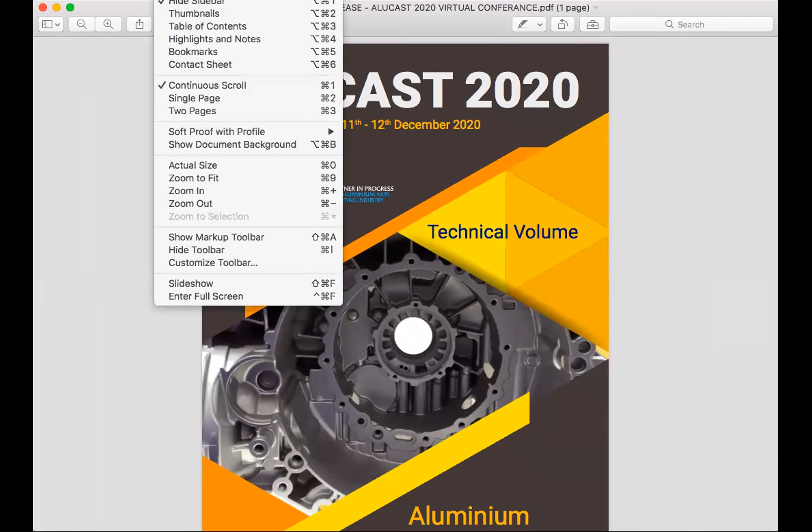Presentations. First on my agenda today is the launch of the technical volume of the conference. And I will be requesting our special guest for the day, Mr. Kaushik Manna, the Chief Operating Officer of Rockman Industries, to release this publication. Samita, can I have the report on screen, please? Sure. There we are. Mr. Manna, can I request you to declare this technical volume as launched?

Yeah. Good morning, everyone. So this is my honor and pleasure to declare this technical volume as launched. Thanks, Mr. Manna. Right. Copies of this technical volume will be received by all registered participants on a pen drive, specially prepared for us by Raga, the Raga group. Thanks to Mr. Rahat Bhatia.

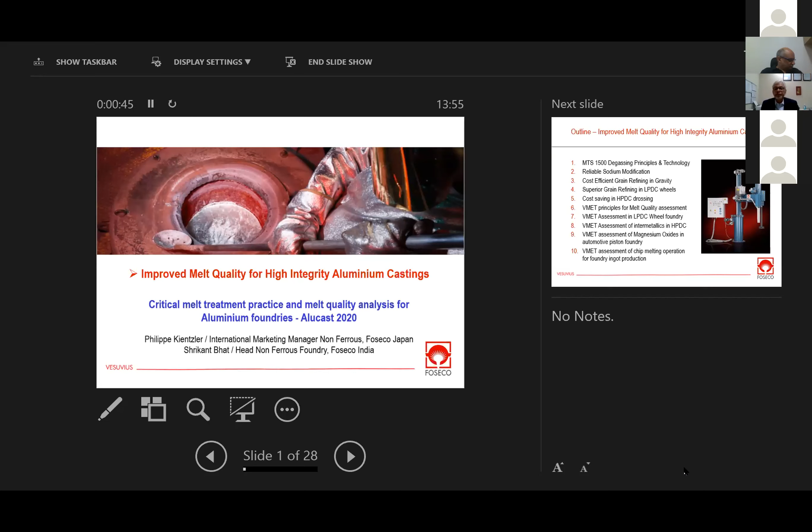In the last 10 years, I've lived in Asia, China, Japan, and I've been traveling across most Asian countries looking at foundry practice, improving melt quality, supporting our local teams in removing some defects or developing some new products. So I've summarized some of the projects I've done in the following paper. We are not going to review everything because that's in the paper, but I will run through some of the key points that we have found about the key benefits of the technology, but also about what we call VMET,

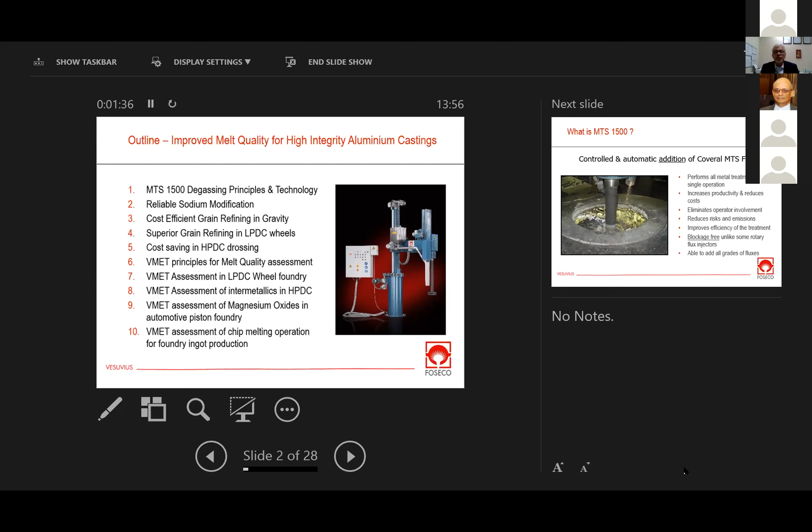which is our new metallurgical assessment of melt quality, because more and more today's foundries want to know how good their melt is. And they are looking for tools to evaluate the melt quality either before casting or in the melting furnace. So this is a very important step, and I will review some of the important things we have done in high pressure die casting, but also in low pressure wheels, as well as in chip melting, for instance. So first of all, most of you, I hope, know now about MTS, this technology.

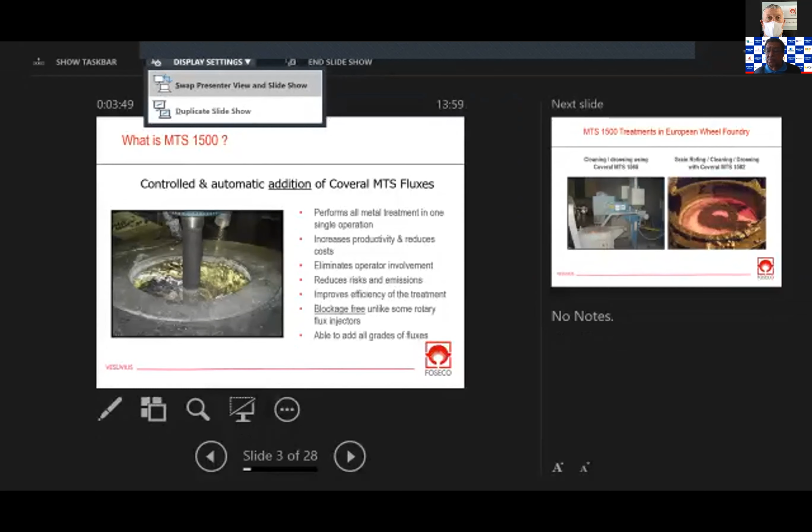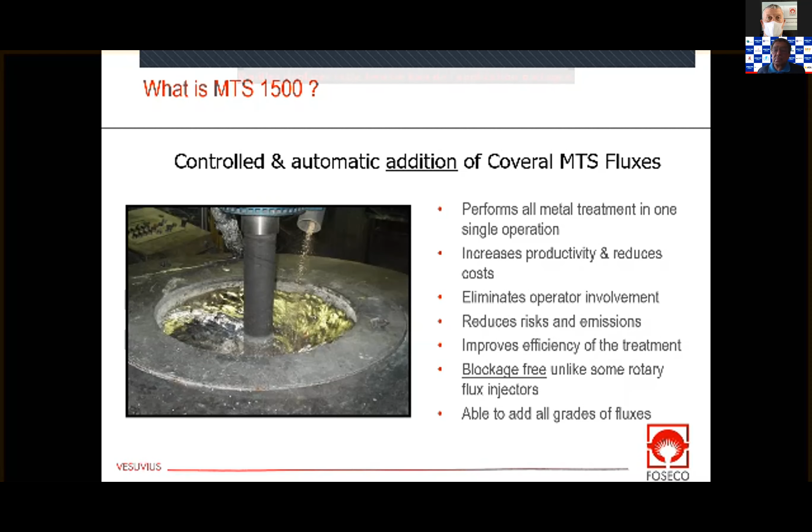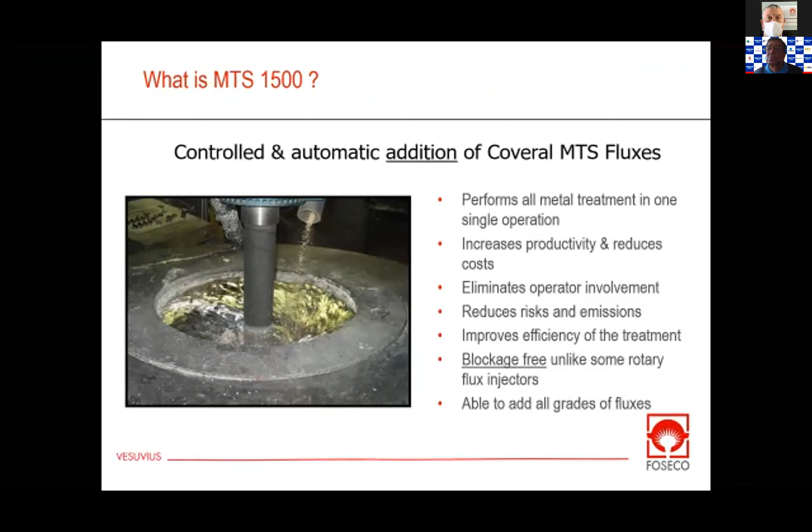So, about 15 years ago, we developed this technology called MTS 1500 Metals Treatment Station. And we've been quite successful because this technology enables every kind of foundry, whether it's sand, gravity, low pressure, or high pressure die casting, to see some kind of benefits. So in the early days, the benefits were cleaning and drossing. And these are examples from low pressure wheel foundries making OEM wheels.

Very quickly, we moved into more difficult applications, such as titanium boron grain refining, which is a very important process, both in gravity and also in low pressure wheels, because it has a big impact on elongation, on UTS, on mechanical properties of the casting. So nowadays, we are able basically to use this technology for some kind of benefit in almost every segment of the aluminum foundry.

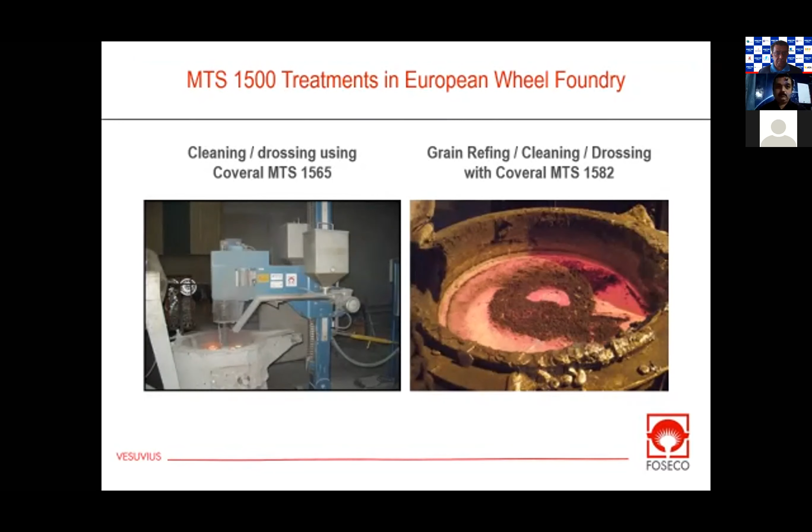And last but not least, our latest work has been in high pressure die casting, which was always perceived as a less stringent or less critical area. But we find out nowadays that more and more high value castings are made with the high pressure die casting process. So the control of quality and achieving higher melt quality, even if it's not degassing, but achieving better cleaning, removing oxides and inclusions, especially intermetallic inclusions that can lead to hard spots, these are critical points that high pressure die casting foundries are having to address these days.

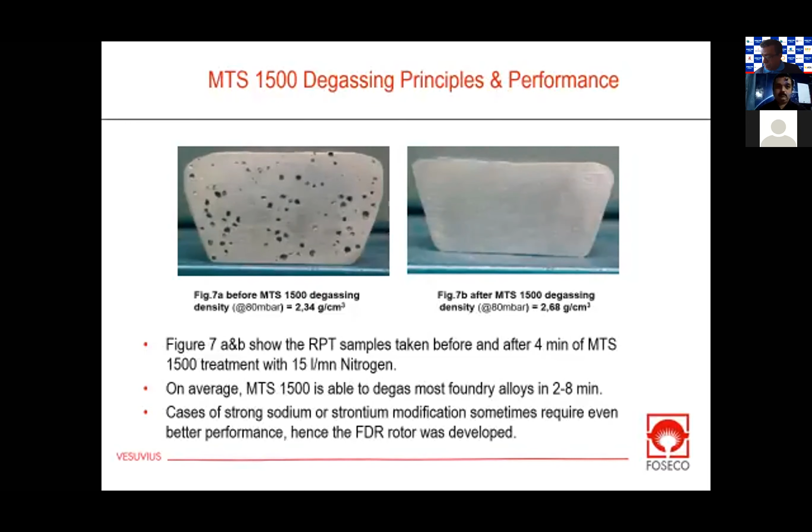How did we achieve that? Foseco has several R&D centers in the UK, in Germany, in USA, and we've done a lot of work to better understand the degassing and the degassing performance. So here is an example we did in our lab in Germany. We have a 500 kilo crucible where we are able to do live experiments and live treatments on real melts. And in the early days, we had our standard rotor, which is called SPR, which is the blue one.

And you can see here plotted how the hydrogen content will vary over time during the degassing process. Here, typically, we're showing 4 minutes of degassing.

Now, because we've done a lot of R&D and work internally, we've developed the rotor which we call XSR, shown there. You can already see that rotor will drop the hydrogen level much faster than the standard rotor, so this is an improvement in terms of the degassing efficiency.

And today, the XSR rotor, the red curve, is the standard that we have at our customers in many parts of the world, including in China, for instance, where I have spent a considerable amount of time. But we continuously need to develop new technology and improve the performance.

So in the last decade, we've been working on a new rotor called FDR. This is the yellow curve shown there. And you can see that this new rotor enables us to further degas much faster and to much lower levels than was previously done with our standard rotors.

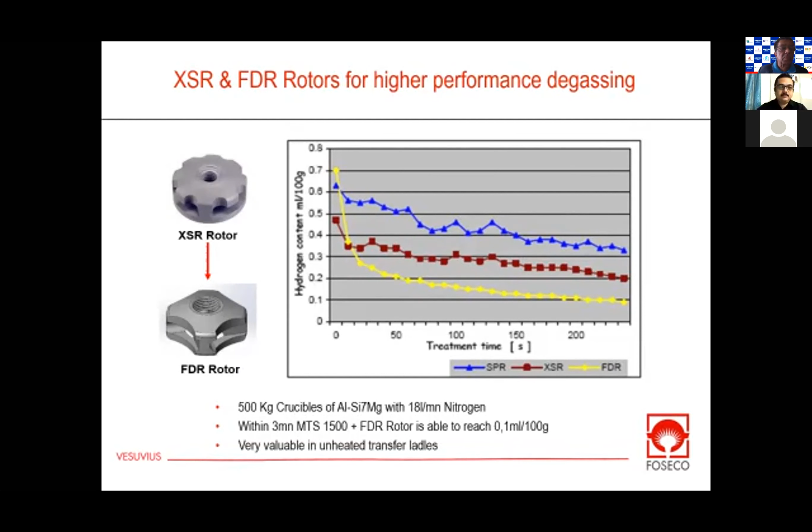Now, this may not be needed in every industry, it may not be relevant in high pressure die casting. Most of our customers are happy with XSR because degassing is not the main issue they're facing. We have other things to worry about: inclusion, oxide films, hard spots, and hard inclusions. But in terms of degassing, FDR will be in the future our best-in-class product for those foundries who worry very much about degassing.

So we moved then to some different applications. You all know that in the past, mostly in sand and gravity casting, sodium was used to modify the eutectic structure of our aluminum silicon alloys. Nowadays, many foundries have switched to strontium, and strontium is recognized as the better way of modifying most castings, whether it's wheels in low pressure or cylinder heads.

Most of the people in the industry use strontium, but there are a few applications which remain with sodium, because when the cooling rate of the casting is not sufficient, when you try to use strontium modification, you sometimes have shrinkage, residual shrinkage that the foundries cannot get rid of.

And for those reasons, I know many foundries around Asia and around the world who are still using sodium because sodium is a much stronger modifier than strontium. Here's the case though: the problem with sodium is you have to use a lot of sodium, you have to use a lot of flux.

So we've developed an application where basically we can reduce the addition rate of the sodium. In this typical case shown here, we go from 0.3 to 0.1% addition using our MTS process. So for the foundry, they will get the same quality, but there's going to be a significant reduction in cost in the addition of the sodium, in the addition of the flux. So this will be a benefit for those foundries.

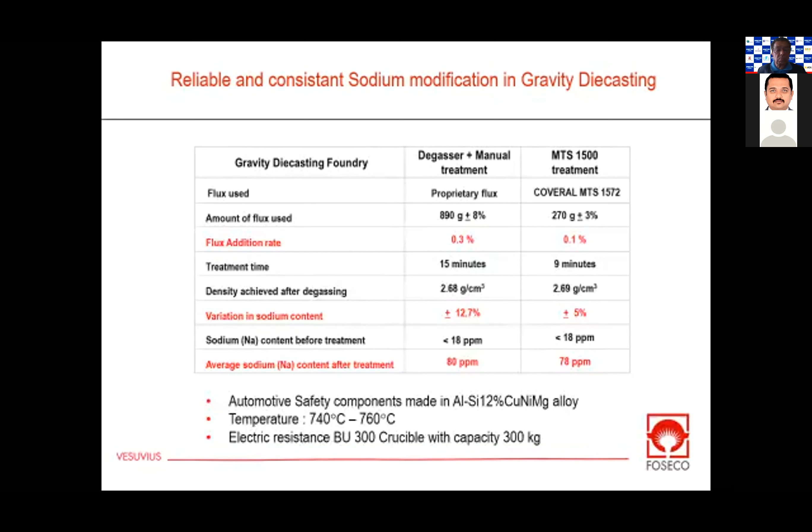And in Europe, in Germany, but also in China, we have some customers who are still using sodium for this specific application because they cannot get the same level of quality with strontium.

Then we did some investigation to further understand this. And again, we went back to our lab and to our 500 kilo crucible which we have in Germany, where we are able to do a set of experiments. And what you see here is we increase the amount of flux used on the x-axis, anywhere from 200 grams to 1 kilo of flux of a sodium modifier, and we measured the sodium pickup that we have in the melt.

And what you can see is that if you use this MTS process, basically the sodium pickup, for the same parameters, the same crucible, the same condition, the same alloy, everything else being the same, is about 2 to 3 times higher than when people use the traditional method of introducing sodium.

So again, many of these foundries in Europe, in Germany, a few in the USA, but also in China, we now have customers who have moved away from the traditional sodium process to our MTS process because basically they're getting higher yields of sodium modification.

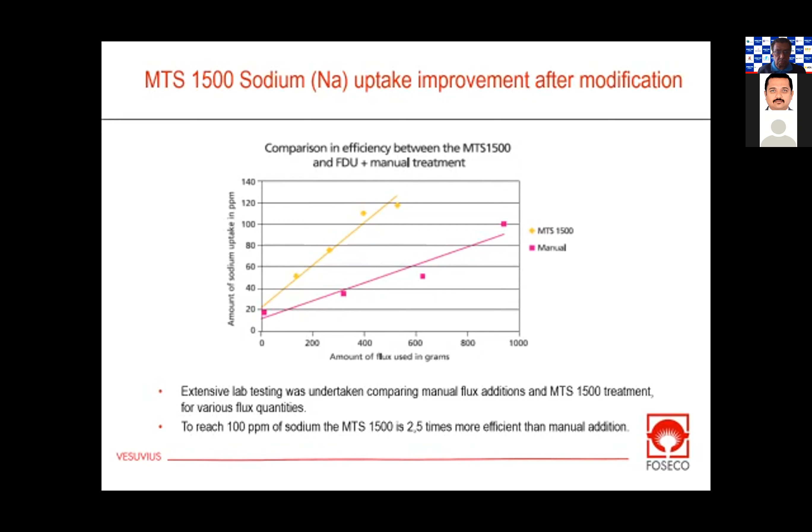Now, this means either better quality for the casting, less shrinkage, and a much finer eutectic structure, or it means less sodium use, so a lower cost for the foundry because they can reduce the addition rate of the sodium or the sodium flux. So again, this has been an important breakthrough for us.

Then we moved into grain refining.

And all of you know that in sand, in gravity, and in low pressure, titanium boron grain refining is a very important part of the process. And especially when you do safety components, you know that the mechanical properties, whether it's elongation, whether it's UTS, are directly correlated to the grain size.

Of course, there are other things. There are oxides, there are other parameters that will affect these mechanical properties, but grain size is a critical factor if you want to make wheels, if you want to make certain safety components, suspension, transmissions, and things like that.

So we had a lot of success in gravity, automotive foundries, or suppliers who make suspension knuckles for the automotive foundry. And here's an example from one of those foundries where you see the grain size before. This is a sample solidified from the melting furnace before grain refining, on the top.

And you can see the large grains. And on the lower side, you can see after addition of 0.04%, which is much lower than the normal Tibor grain refiner, you can see the structure we get.

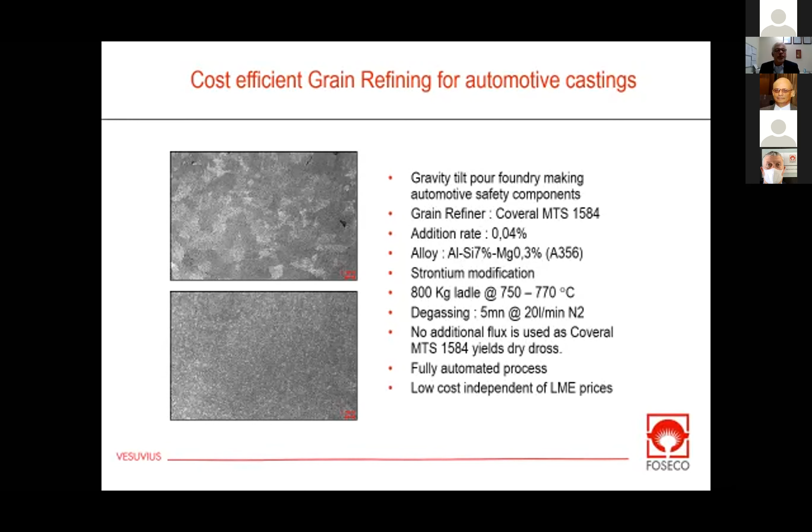So many of these gravity foundries have switched from master alloys, and I'm showing here a little calculation and a cost evaluation we did a few years ago in Europe with one of those foundries, where we compared.

So they were using roughly 1 kilo of Tibor master alloy per ton of melt, and we were able to reduce this to 400 gram because our grain refiner has a higher percentage of titanium boron. So we are able to reduce the addition rates, and we are able to offer a much stronger grain refining and achieve a much finer grain than what they would otherwise achieve with the master alloy.

So for those foundries, there's two advantages. One of them is a finer grain, better mechanical properties, and a cost reduction because of the reduction in the flux compared to the master alloys. So those foundries who are using this process have completely stopped using the Tibor master alloy. This is a significant saving for the foundry in terms of purchasing, okay?

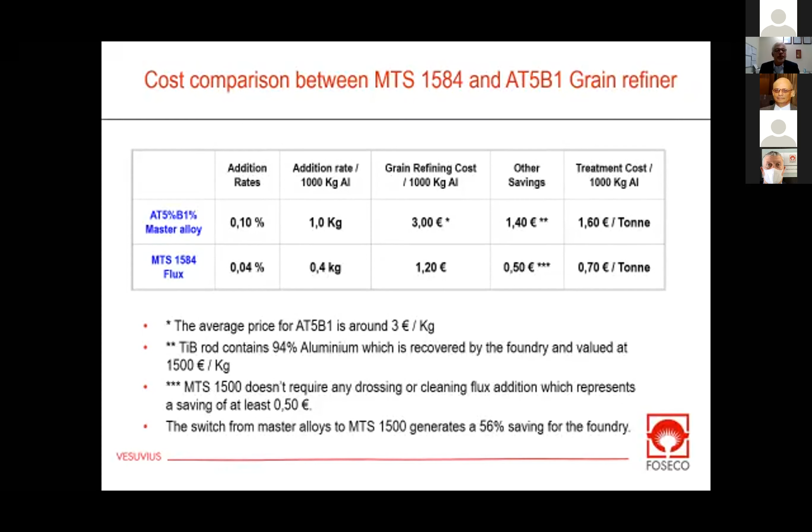So not everybody's using it, but I think more and more foundries nowadays are doing this kind of comparative work, and it doesn't always have the same outcome. It really depends on the requirement of the foundry. Those foundries making safety components, those foundries making critical components will see a benefit in this. Of course, if you make very general castings, non-automotive castings, maybe the master alloy will be good enough. Maybe this is not necessary. This is for every foundry, basically, to evaluate and to decide for themselves.

After that, we moved on to a much more challenging segment, which are the aluminum wheels made in low pressure. And as you know, this is very important in India, in China. There are hundreds of millions of aluminum wheels made, OEM wheels made for the cars every year. And these wheels are safety components. They have to be exempt of gas and shrinkage.

We cannot tolerate oxides or inclusions, especially if they're above a certain size, because they will reject the wheel. They will lead to premature failures. And of course, we need a very fine microstructure in order to get the mechanical properties.

So this is an Asian automotive wheel foundry, a very large group, which has many foundries and many low pressure machines. So their traditional process, and you have the parameters summarized here, they were using a 700 kilo ladle in which they were adding 500 gram of master alloy and then doing a 9-minute rotary degassing treatment before transferring this A356 alloy into their furnace.

So we introduced our new process side by side with their traditional process. So the ladle's the same. We completely removed the master alloy and we added only 310 gram of our new titanium boron flux grain refiner, which comes out to be 0.04% addition rate. We kept the degassing the same. So all other parameters are the same.

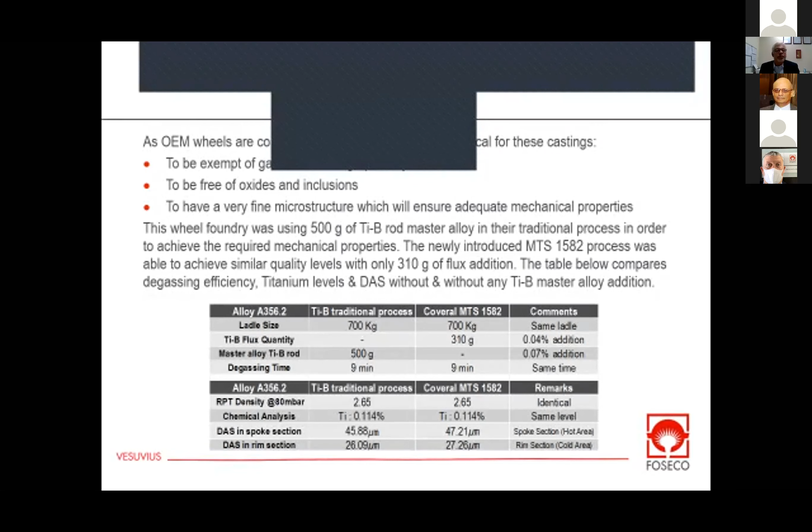Then the foundry did some wheels. They cast the wheels, they took some wheels, they looked at the density to make sure everything was comparable. They looked using the spectrometer. They looked at the titanium pickup because they wanted to make sure that if they switch from a traditional Ti-B master alloy to our product, they wanted the titanium pickup to be in the same range. And you can see here, they had the same range.

They made a certain number of wheels, which they heat treated using the standard T6 heat treatment. And then they took samples from the spoke, from the hub, and from the rim of those wheels. And they measured the DAS, because even though DAS is not directly related to the grain refining, DAS, dendrite arm spacing, is a critical parameter of the wheel manufacturing process.

In modern OEM wheels, you need a DAS which is smaller than 50 micron. I'm only showing this because for the wheel foundry, this was a way of checking that the wheels they were making with our new process were within specification. If the DAS had been higher for some reason, they would have rejected the wheel and said something is wrong. So the DAS measurement is only a way to check that this wheel is within the foundry's specification.

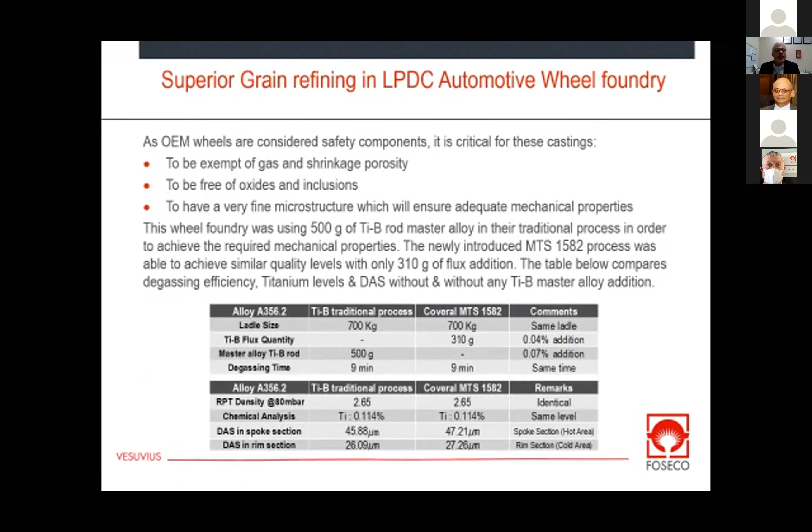The first reason is the improvement of mechanical properties, which we were able to demonstrate. The second is the reduction in the addition rate - 0.07% for the Ti-B versus 0.04%. So for the foundry, this represents a saving because they will have a lower cost when it comes to grain refining.

This is a very important aspect for the wheel foundries, and we are currently extremely busy going to many wheel foundries where we are doing trials and expanding our experience with this product to many automotive wheel foundries across Asia.

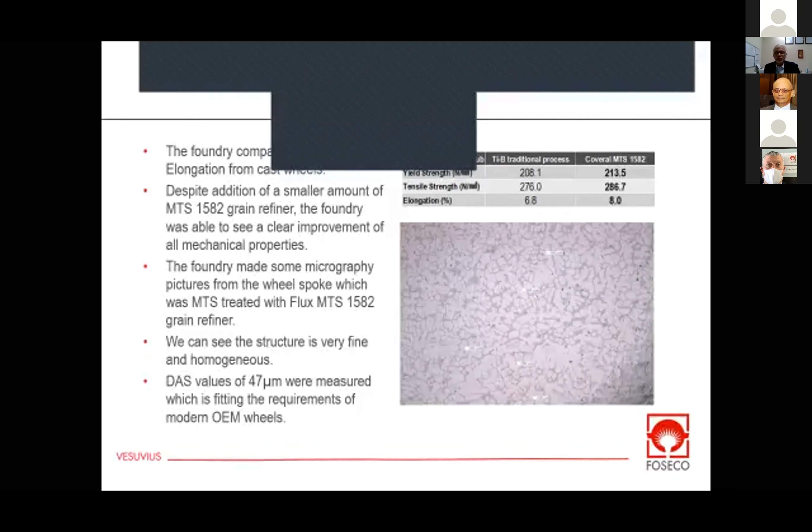So enough for gravity and low pressure wheels. We need to talk now a little bit about high pressure, because as I mentioned in my paper, nowadays 50% of all aluminum castings in the world in tonnage are made using high pressure die casting. This is becoming the most important process in the aluminum industry.

In the country where I'm currently located, which is Japan, we know that 70% of all aluminum castings made in Japan are now made by high pressure die casting. So there is a clear trend that castings are moving from gravity and low pressure to high pressure die casting. There's a real motion, and this trend will continue in the future. So we need to be more focused on high pressure die casting.

So I visited a number of very large automotive high pressure die casting foundries, and this is an example of the work I have done in one. In this case, this is a supplier to the OEMs, to the Japanese and Chinese automotive foundry.

They are using a very large capacity ladle to transfer the melt from their melter to their casting furnace - 1.4 ton, which is very large, and they're doing 180 ladles a day. So this is a very high productivity, very high intensity, high pressure die casting operation.

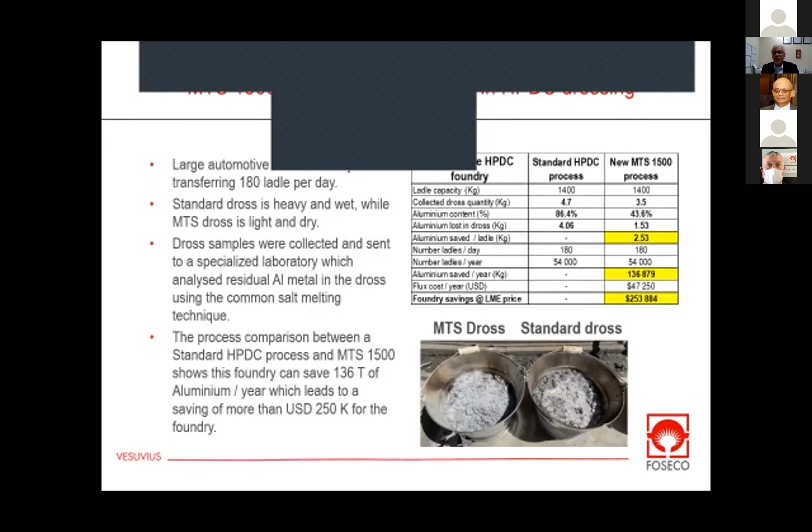So all we did is, rather than use their standard HPDC process, we took the ladle and we used our standard MTS process. And the result of that is a saving of 136 tons, which when I calculate at LME prices is more than $250,000 per year of saving. So this, for high pressure die casting, is a huge saving for no extra cost. So we now have many foundries in China, many foundries in Asia who are looking at this technology and who have already invested in these technologies just for saving aluminum in the dross, because this is a huge cost saving for them.

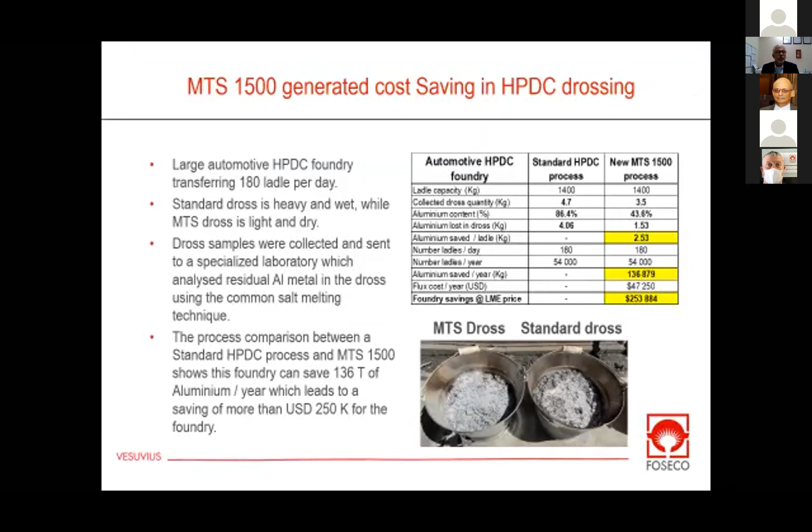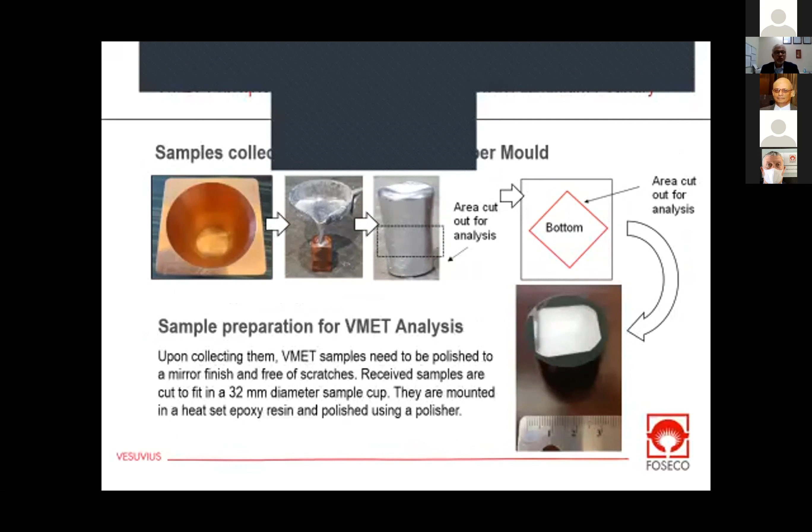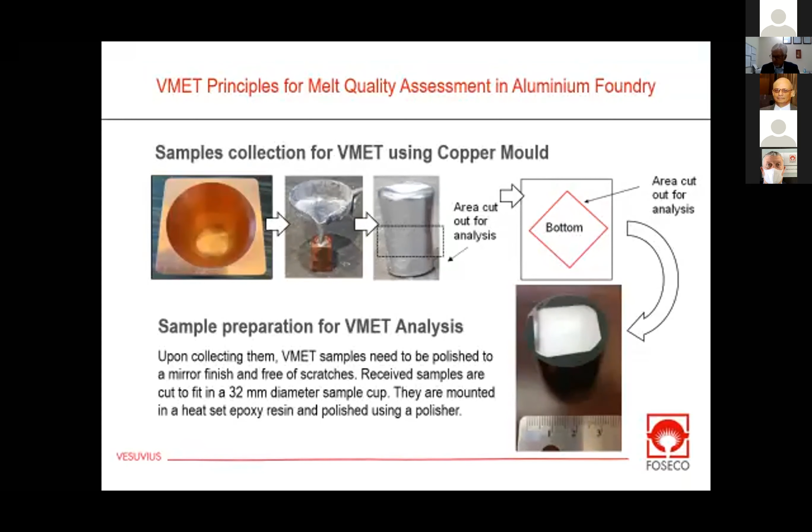So let's talk a little bit about the second part of my paper, where I am combining a new technology called VMET, which is our proprietary technology, which we are using to assess the melt quality, to try to benchmark the melt quality. So we're using a copper mold, which is used in grain refining. People who do grain refining samples usually use a copper mold. So this is something we have in our lab. We take a sample from a melting furnace, from a ladle, from a casting furnace, from a crucible, and then we section the sample, we polish it as you see here, and then we use our SEM and EDS to analyze.

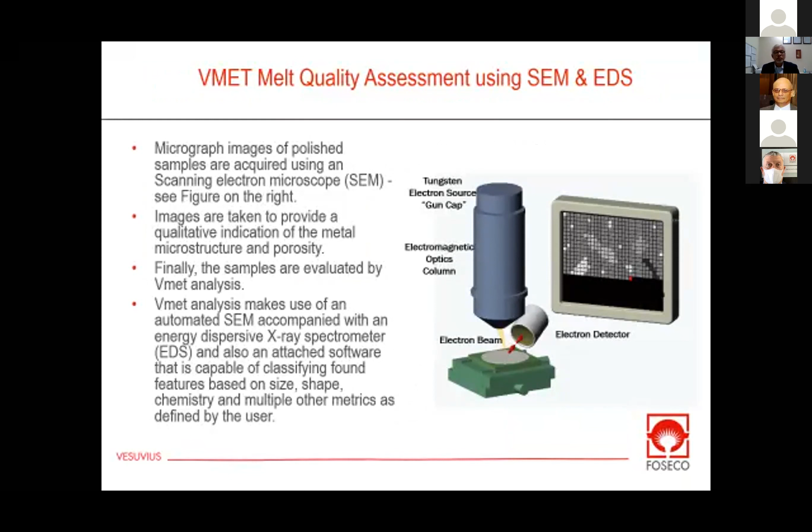Basically what we are doing here is we're able to look at the structure with a scanning electron microscope, and the EDS is a spectrometer that can analyze the chemical nature of the features. So is it an oxide? Is it magnesium oxide? Is it an intermetallic rich in iron, for instance, in high pressure die casting? Is it a pore? Is it a bifilm? Is it a hardened inclusion? So this technique enables us to identify in a given sample any pores, any oxides, any non-metallic inclusions that can lead to defects.

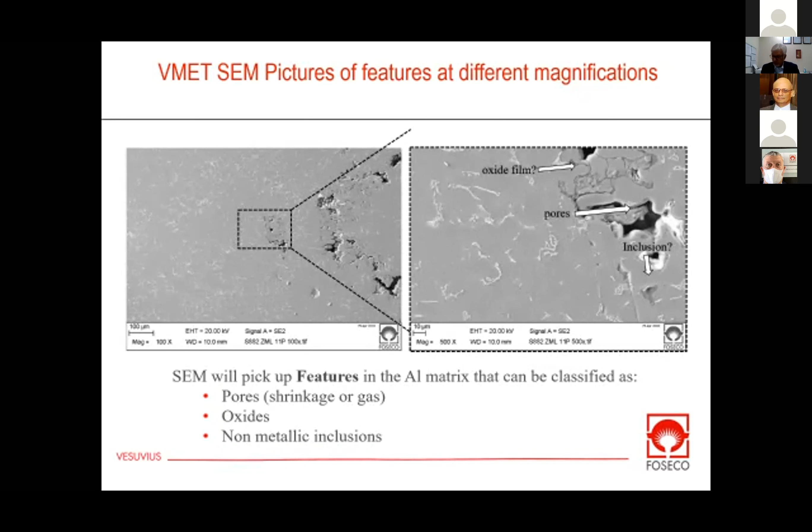Now, this is very important because it tells the foundry something about their melt quality. Before you start casting, before you turn on your robot, you want to know how clean is my melt, how good is my melt, is my furnace ready, or is it very dirty? So by taking this sample, we are able to help foundries, give them some kind of a quantitative measure. Now, why do I say quantitative? This is because this software we developed is going to scan the sample and is going to count all of the defects that are found. So all of the oxides by nature, by sizes.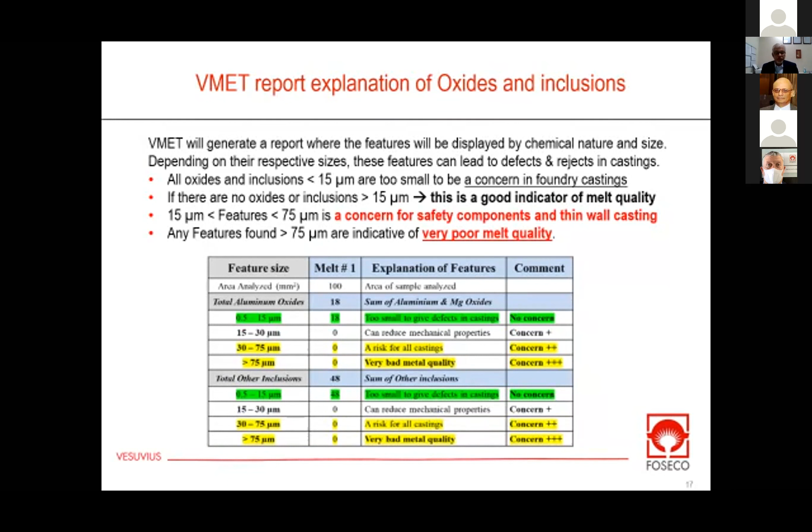This is in safety castings. This is when we start having castings that break, castings where we have cracks, castings that are not gas proof, not pressure tight, because there was some oxide or some porosity in the casting. So this tool is a very interesting tool to try to map and to try to benchmark the melt before we actually make the casting.

So about 10 years ago, we went to a very famous European wheel foundry, which is using low pressure A356 alloy. And we took a VMET sample of the melter, which is the column A356, the white one. And you can see we have found, and that's normal in a melter, you know, when you melt ingots, when you melt chips or scrap, you create a lot of oxide. So this is expected, okay.

Then the foundry has some kind of rotary degassing machine, not using flux, simple rotary degassing. So they process the ladle, and after treating the ladle for 10 minutes, that's the yellow column, we took again a sample, on which we did a VMET analysis, and you can see a dramatic reduction in the number of oxides that we found, in the number of inclusions. And more importantly, the last line, the features bigger than 15 micron, which are a real concern, those that will lead to rejected castings. You can see a real reduction.

So this is a very nice proof, for those people who don't believe in rotary degassing, that rotary degassing not only removes hydrogen, but has a direct effect on inclusions and oxide. And in the past, especially in high pressure die casting, many people disputed that. Many people in the industry didn't believe that rotary degassing would have an impact on their melt quality.

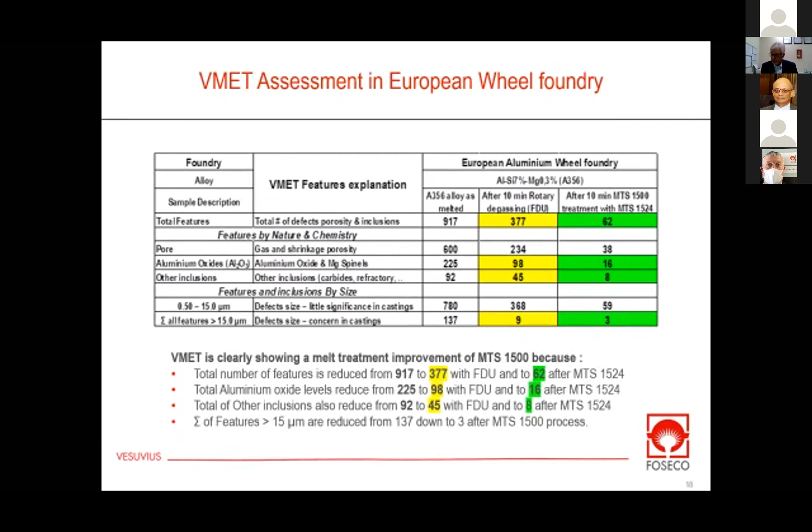We don't need to dwell on this one. This is the same one. It's in the paper where I show this on the graph. Okay, let's now talk about a very interesting example. This is an example in high pressure die casting.

Mr. Kientzler, it's time. Okay, sorry. I know I speak too much. So anyway, are there any questions? Yeah, I think we'll have to go ahead with the questions. I'm sorry to interrupt you here, but— No, it's no problem.

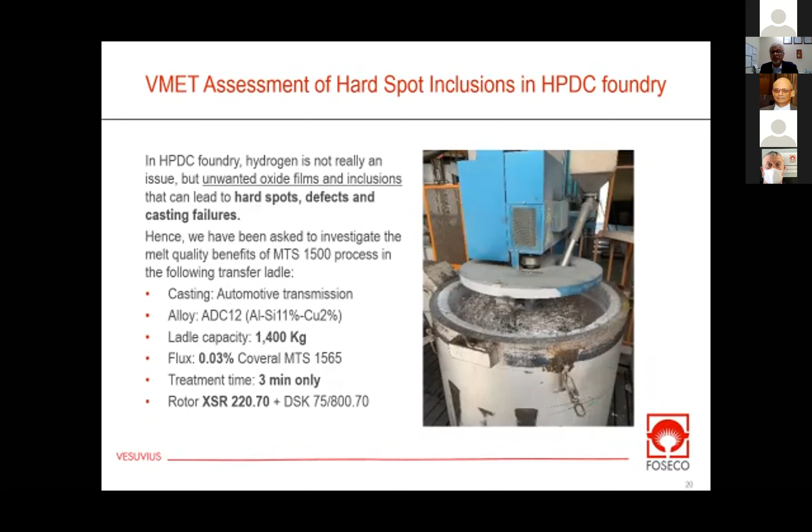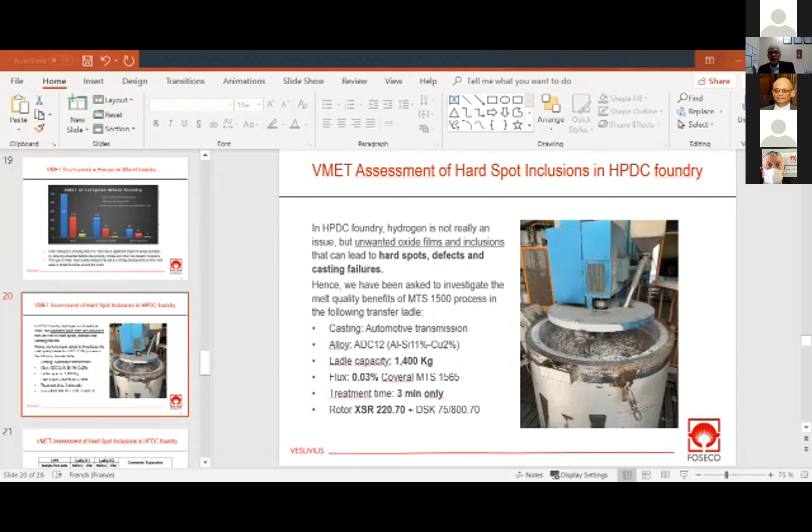There is one question just come in from Mr. Vashisht Kumar Tripathi. He's asking you, can you show some data on the comparison of molten metal purity in terms of the inclusions? I think you have shown data, but if you want to answer this, it's open to you. Yes, let me, oh, now I've lost the, hold on. Can you still see my presentation? Yes, we can. Sorry, so let me switch to the last one.

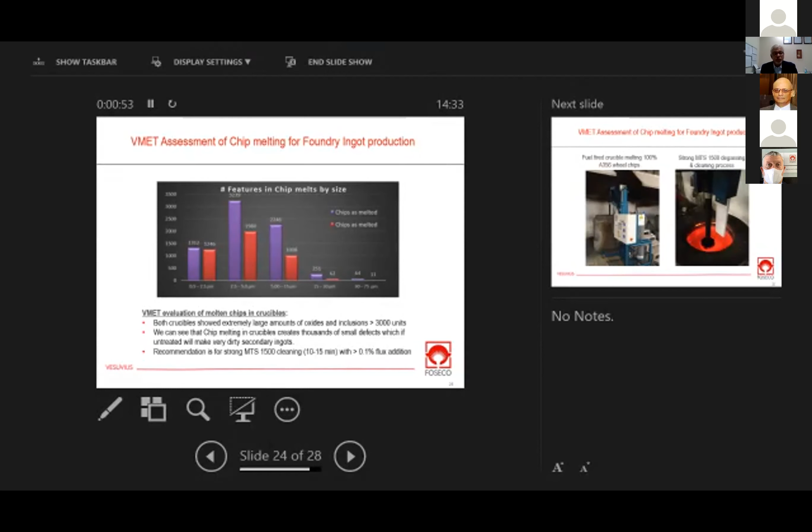Here is the same data, which shows you the number of aluminum oxides. So what I would say is, and of course many people in the industry are aware of that, the people who remelt chips, even if it's only 20% of their machining chips, whether it's in high pressure. I visited many very large foundries; this is becoming very popular to save money rather than selling out the chips, the machining chips.

Many foundries in Asia are now buying melting furnaces to try to remelt the chips themselves. And this is becoming very popular, both in high pressure and also in low pressure, and sometimes in cylinder head in gravity, whenever you generate large tonnages of chips. What I would say from this study we have done, people have to be extremely careful how they melt the chips, because you can see that if you do not melt them properly, if you do not submerge the chips in a dedicated chip melter.

Now, we don't have this, but there are furnace makers in India, in China, in Europe, who have developed chip melting furnaces, specific furnaces that enable you to remelt. So I would always encourage the foundries to talk to these people and to invest into a real furnace that is designed to remelt chips, not try to throw 30% of chips in their own melting furnace, because it can really mess up their melt quality. It can really dirty the melt if the chips are not properly melted. And this is what this last case has shown with this chip remelter.

So with that said, let me get into the presentation here. So talking about die lubricants, true cost savings. When my colleague Vishwanath asked me to talk today, I really wanted to do it more on an education level. Talk about what we look at to make sure we're focusing on the back end of the casting process. But before I get into that technology part of it, I'd like to talk a little bit about what drives us as release agent manufacturers to improve our technology.

And the first there, it's always been there for a long time, increased focus on productivity. And for die casting, it's historically been make things faster and hotter, just controlling that thermal part of the process. Can we kick parts out? And that's still the case now, but it is changing, as I'm going to talk about when we get to some structural discussions. But another aspect that's always been there is reduced waste. Obviously we want to improve our efficiencies, reduce scrap and rework.

But another one that's coming up a lot more is plant effluent and water. Back in 2016, I did present a paper here to ALUCAST on water conservation. I think it was 2015 when the really significant drought hit. So obviously, any conservation we can do is better for everybody as far as water goes. But tooling cost is also there on waste.

And then complexity. These net shape castings that we're making today are highly complex, and that really puts stress on a die lubricant. We have to make sure those parts fill out well, release well, and that can be a real challenge. So it's charged us to step up our game in our technology. But now, let's camp out here a little bit. E-mobility.

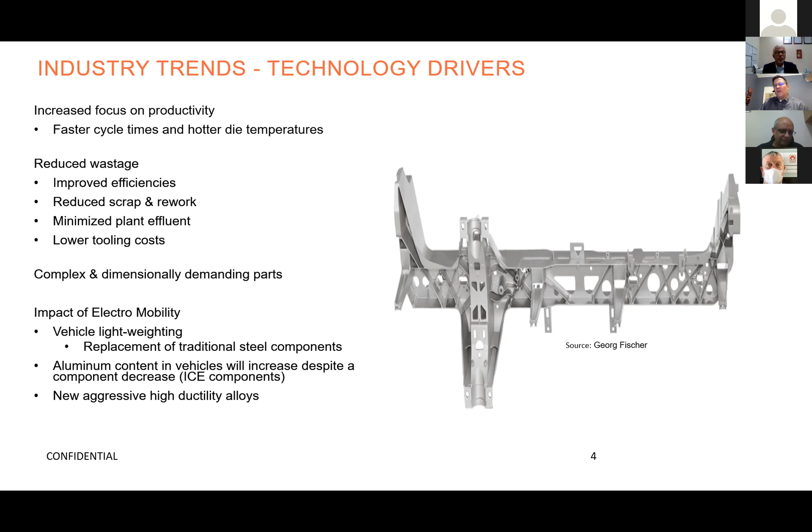I remember when the first structural parts were coming out, and it was the new thing, but now it's becoming commonplace. I know there are some casters in India that are starting to get into this. They're investing in some machines, and it's going to happen. It's a wave. There's no doubt it's heading this way, and this has really had a major impact on our business and our technology, because these alloys are pretty aggressive.

So the structural alloys. They're obviously low iron alloys to get that ductility that we're looking for, and they have a high affinity for solder. So we really have to provide better protection on the die with our lubricants for these applications. I already talked about net shape castings, but these castings now, what used to be so many stamped and welded steel components into a net shape casting, are getting extremely complex and large. So we have to have great metal flow and good release characteristics.

But another big part of this, and this impacts all casters that paint parts, is post-cast processing. We look at these castings specifically for e-mobility because they're lightweighting, they need Class A surfaces, but a lot of these castings are going through cathodic coatings, welding and bonding. It's amazing how many parts now are actually glued together.

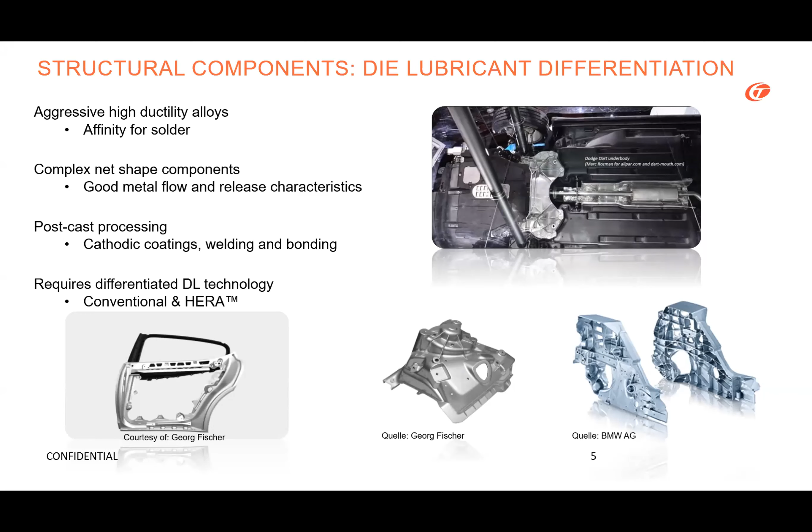We have to make sure the release agent film on that casting, after it's cast, can be removed so the part can be painted or bonded. That's a bit of a misnomer—you may hear people talk about a paintable die lubricant, but it's not really that the die lubricant is paintable. The die lubricant chemistry has to be cleanable so parts can be painted, usually through an alkaline cleaning process. Our sister company, Surtech, is always there to help the industry with any issues, but when we troubleshoot problems, it's typically the cleaning process we have to attack.

All this requires differentiated technology, whether it's a conventional diluted die lubricant or what we call HERA—high efficiency release agent for Chem-Trend. You may also know it as water-free or a micro spray. This goes hand in hand with structural castings and all the tooling technology coming along with it, just as what we're seeing in tooling with additive manufacturing is really changing the game and how we need to approach our chemistries when we develop products, so it adapts and provides optimized performance for a caster.

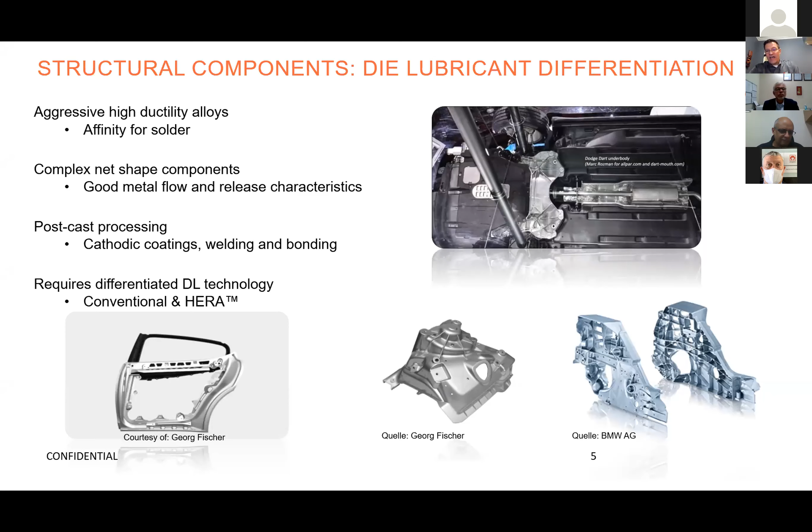I gave a presentation at ALUCAST in 2016 about die lubricant functionality and what we measure—what a die lubricant is supposed to do for a caster. I'd like to retouch on that because I think the education aspect is important. The more the community understands what we're trying to accomplish as a supplier in getting technology out, the better you can use it for improved productivity.

Die lubricants, obviously, we need to release a part—it's often called a release agent. We use the terms die lubricant and release agent hand in hand, but we release parts and also lubricate the moving components of the die. At the same time, we have to provide a good barrier coating for the die, for solder protection, erosion, and everything that comes with that. But you may not realize the die lubricant selection can have a huge impact on metal flow.

When we're talking about castings with deep draws, some of these structural parts, you've got to get that metal in there. It's not all heat—a lot of it is what the die lubricant imparts upon that surface of the die that helps you fill. It's a flow promoter. And surface quality—good castings, bad castings—die lubricants can have an impact on that too.

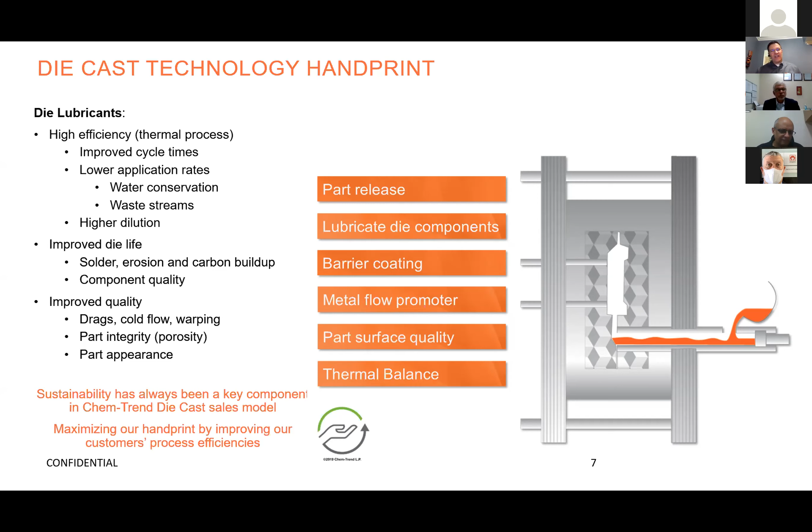So when I talk about all this kind of stuff, I may throw that sustainability part out there a couple times. Now let's shift over to chemistry and how die lubricants work.

Like I said, we're talking about cooling a die. So when you try to cool a die, we're talking about Leidenfrost. What that is, if you ever have a hot pan on the stove, you splash water on it and you see the bubbles of water dancing around on the pan. What they're doing is bouncing around on top of this little vapor barrier. And that is because of the phenomenon called Leidenfrost.

It's keeping that lubricant from touching the surface. If it doesn't touch the surface, it can't cool the die nor build the release coating on the die. That's maximized when we do cool the die. It's maximized at a point called the Nukiyama point, which is where there's nucleate boiling and cooling. I'm going to go into a little more detail there.

But when I talk about cooling, something I want to mention is it's not the lubricant itself that is cooling the die. So it's not the liquid lubricant on the surface, it's when that lubricant evaporates.

So the best analogy I can give is on a hot summer day, when it's 40 C outside, you go swimming, you get out of the water and you feel a chill. What you're feeling is the water on the surface of your skin evaporating. When it evaporates, it takes energy with it. So it's latent heat of vaporization. That's what actually cools.

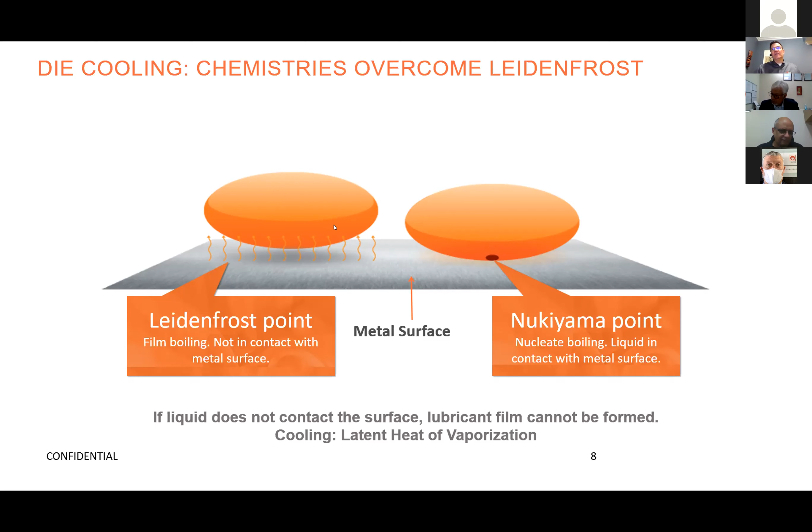So sometimes people say, oh, I need to heat my die lube, I need to cool my die lube. You don't want to do any of that. The die lube is effective in cooling when it hits the surface and evaporates off of that surface.

So when it finally breaks through, that droplet of water and lubricant hits the surface, it explodes. And when it explodes, that liquid evaporates from the surface and takes that heat out with it. So it starts to cool.

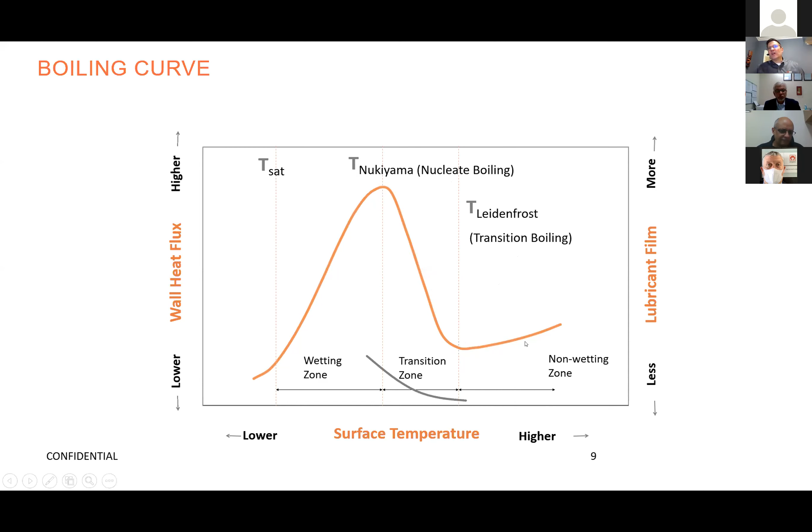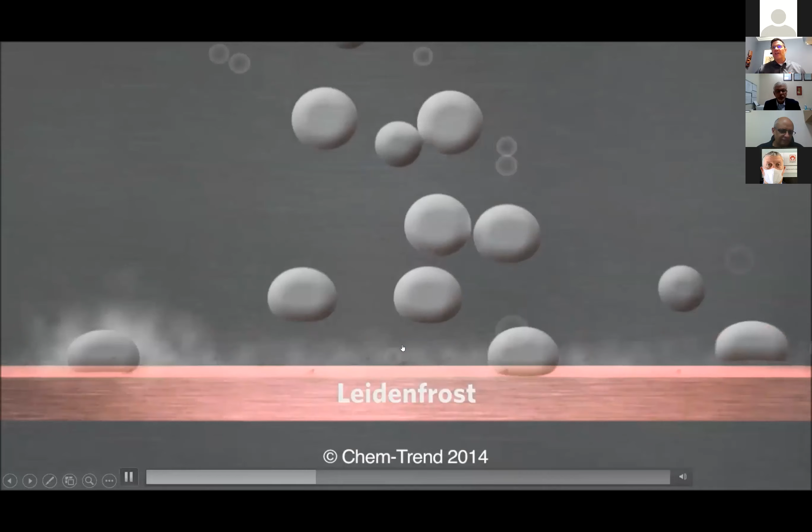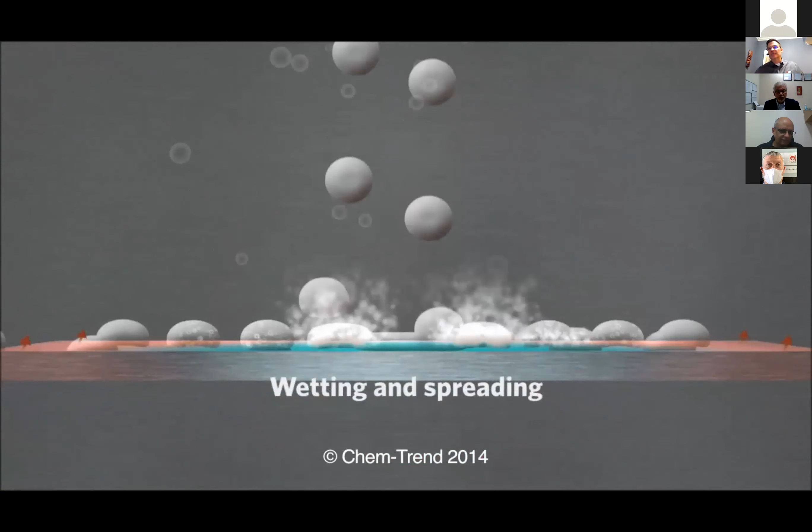Now I have some animation that hopefully will make this more clear. So we're spraying a surface, and these droplets are on the little arrows here. That's the Leidenfrost phenomenon, that vapor barrier. We're not breaking through it, and the droplets are bouncing off until we overcome Leidenfrost and start getting that explosive boiling. So the die starts to cool at that point, and it's maximized when we get droplets that stay on the surface and boil, nucleate boiling. That's where we really start to get wetting and spreading of the die lubricant across the surface, building your protective film.

Now, for years, I hear all die lubricants are the same. I say no, there's a difference. What I'm going to show you now is a laboratory test. When we look at this test, we start spraying a lubricant. We've got two different lubricants here, both Chem-Trend lubricants, and we spray water. We're going to build this cooling curve.

So we start spraying at a nice high temperature around 430 C, and you'll see that as these materials spray, they hit the Leidenfrost point, and you can see it. Once you hit that point, you get dramatic cooling. You can see here, especially Chem-Trend A, it hits the Leidenfrost point and we get dramatic cooling. So you're going to watch this get sprayed.

Once again, this is a laboratory test. To be clear, I'm not saying that if you start spraying a die that's 425 degrees with die lubricant A for 10 seconds, we're going to take you down to 325. This is a relative laboratory test. But what I will tell you is a difference like this has a significant impact on your process and your spray time.

Okay, here we go. Need to pause this for a minute. Upper left-hand corner, there's a chart. Focus on the lower left-hand corner first, this is the higher heat extraction die lubricant, and when that hits the Leidenfrost point, you'll be able to see it. Then we're going to shift our view over to the lower right-hand quadrant to see the second die lubricant. So here we go.

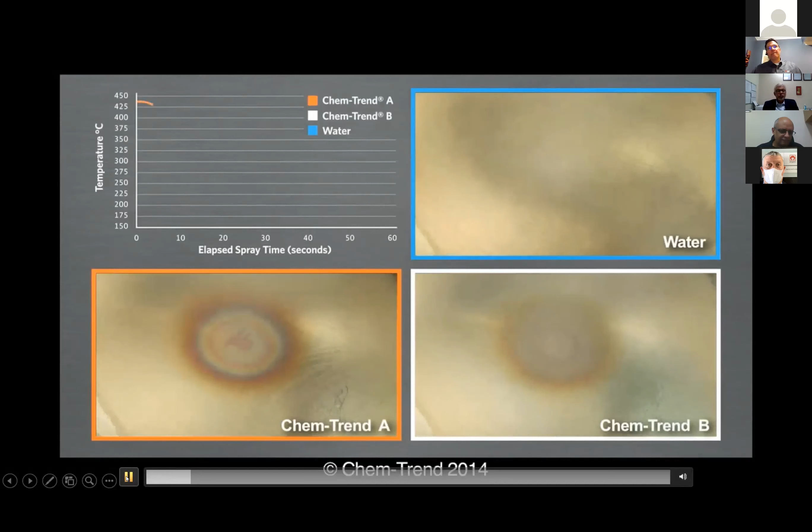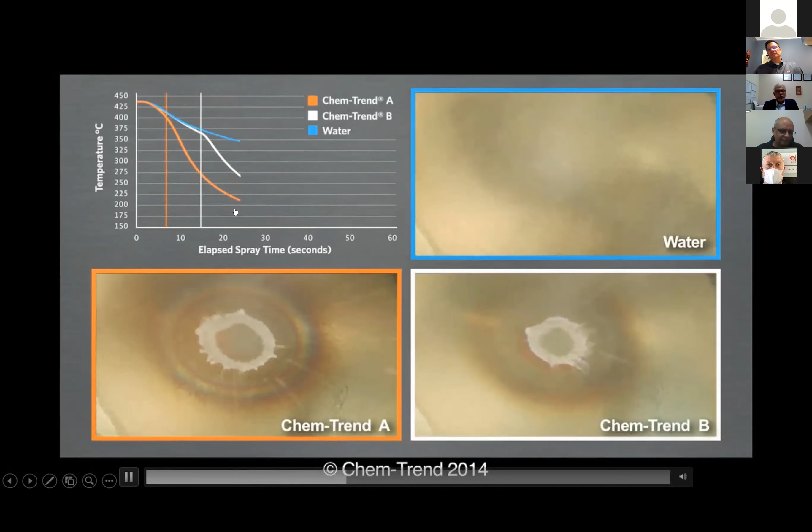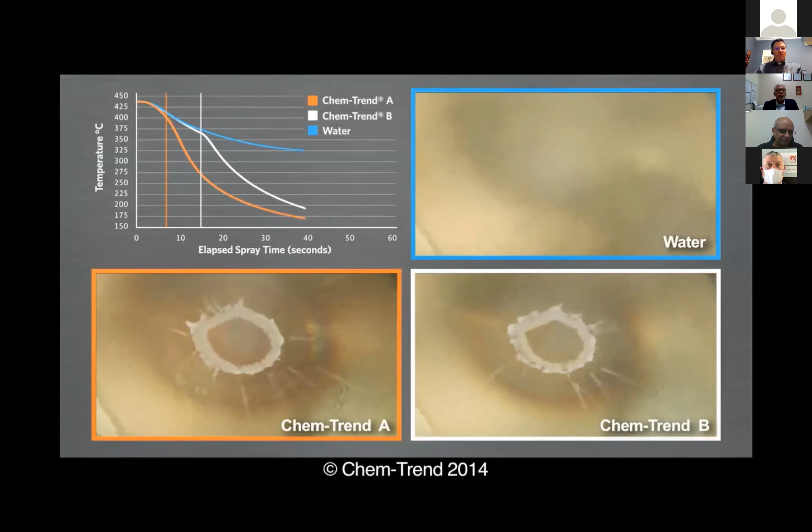There we go, you saw when we hit that Leidenfrost point, all of a sudden you can see that film. Now let's look on the right. There we go, we broke through Leidenfrost and look at that dramatic cooling. And now we wait for water. There we go, water hit the Leidenfrost point.

So if we come back to the chart, a couple of takeaways from this. There is a difference in chemistry, and what you saw there is fully intentional. Typically we're looking for a faster working, higher heat extraction material, but not always the case. If you have some very thin wall castings, say electronics, we're making cell phones.

Do we want this kind of heat extraction? Not necessarily. We need to get the film formation, but we don't want to take heat out of these dies because it's all thermal balance. It's energy in and energy out, so we've got to keep that in balance. If we take out too much, we also get a cold die and all those cold die defects. But the other point is, when used as designed, you get high performance and differentiated performance.

Of course, if you take these and over-dilute them with water, take your dilution way high, more water, what's it going to do? It's going to perform more like water. So you take a die lubricant that's intended to perform a certain way, over-dilute it, and all of a sudden you have the performance of water. And you all saw in this cooling curve, that's a lot more spray time.

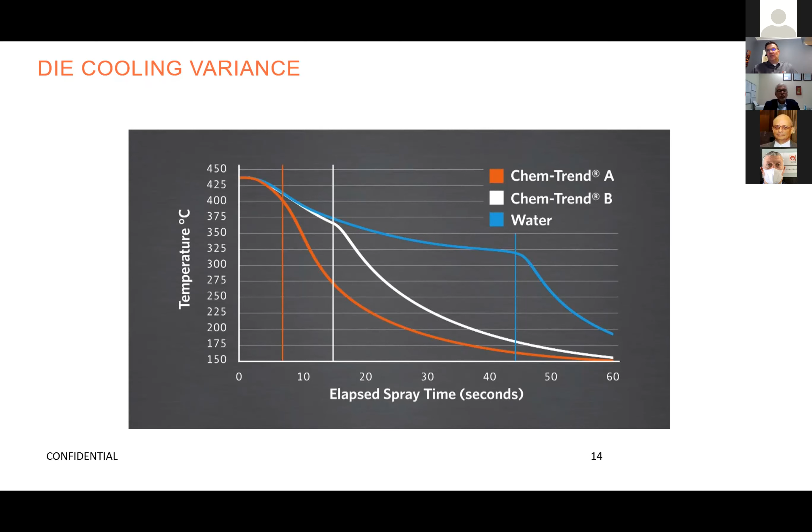So it's wasted cycle time. It's a lot more waste, plant effluent going out, a lot more water usage. And on top of that, you're probably not building the best film possible. I'll come back to that in a moment. So here's a real world example.

If we look at the section of images on the right, thermal images, we look at this zone A, had a max temperature before spray of 377. After spray, it went down to 244. And this is a set spray pattern, set dilution of product. Everything's the same. The only thing we changed is die lubricant technology or chemistry.

So if you go to the high heat extraction die lubricant, that same process went to max 364, and then after spray all the way down to 218 instead of 244. So I don't know if you can all see my video, but it's all thermal cycling. You make a part, you spray your die lubricant, take the die temp down, you inject that molten metal. It's all here again, energy in, energy out.

That energy from the molten metal is absorbed into the die so the part can solidify, right? The die opens up, you eject your part. What do you do again? You spray die lubricant on it to cool the die down, so maintain that thermal balance where you need it.

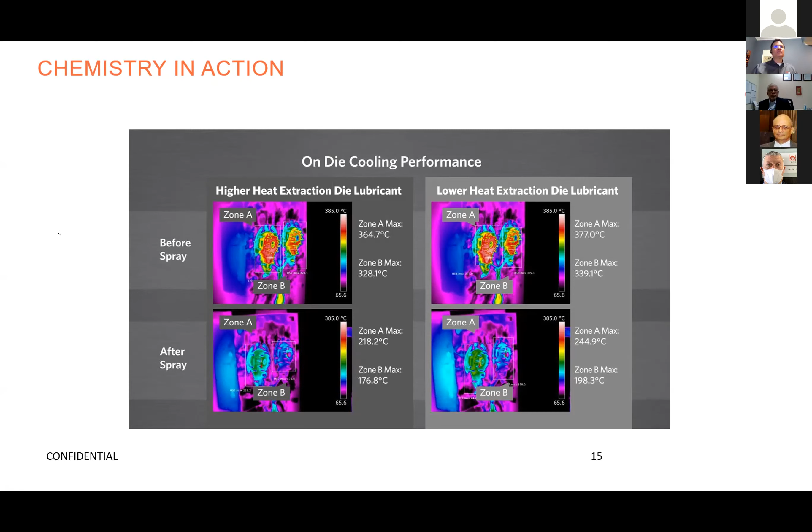Okay, die adhesion. So when we spray a die with a lubricant, we talked about Leidenfrost. So at the high temperatures, if you spray a set amount of die lubricant, only so much is going to adhere to the die. Obviously, as the die temperature goes down, you get better adhesion because you're not fighting against that Leidenfrost so much, correct?

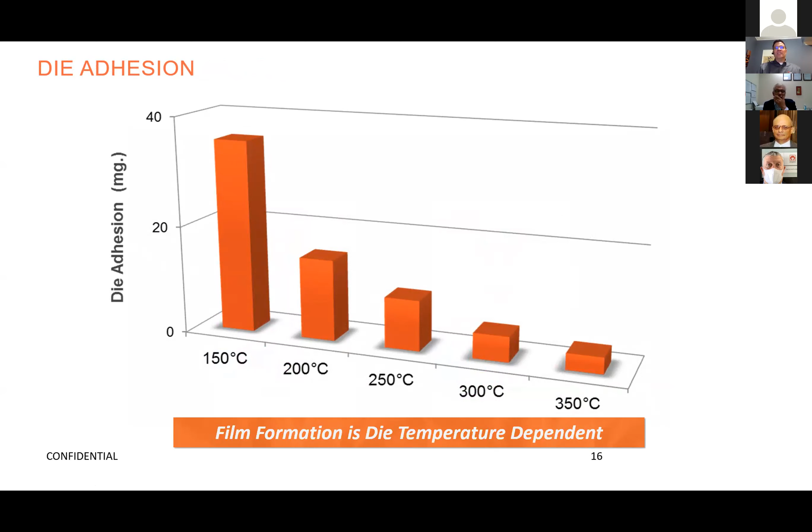Okay, so when we look at technologies for die adhesion, different generations, and we don't really go by this anymore at Chem-Trend, but we have different generations of silicone technologies. And as you can see, as we move through generations, not only did we get better die adhesion at higher temperatures and lower temperatures, but we were able to improve the ratio. So it's more effective at both temperatures. Now, when people look at this, they say, what's going on with that one that you have marked Gen 3?

Here again, more adhesion, more cooling isn't always better. In this case, this was developed for a very large caster because we developed the silicone for one customer. But they wanted certain properties, performance properties in their lubricant. So that's why that was developed, and that's why it looks a little out of place there in that chart, but it was purposeful.

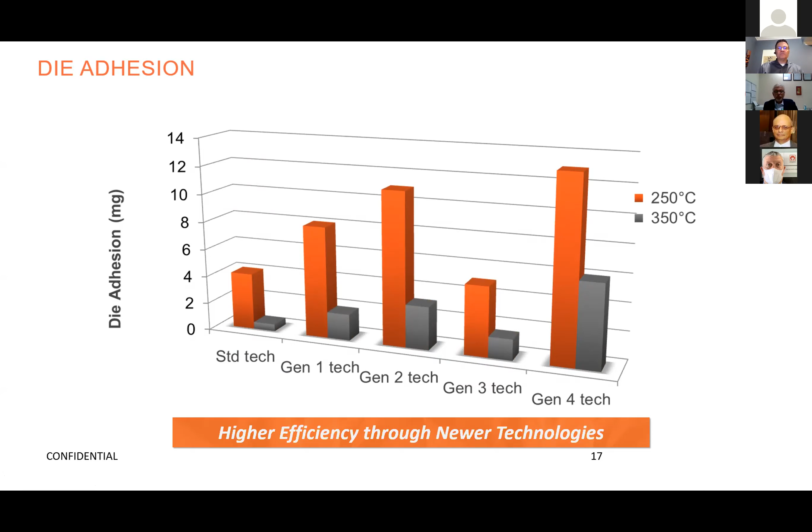Final point is wetting and spreading. Obviously you can't spray every bit of your die. So if a lubricant wets and spreads well, it'll work its way into other areas of the cavity where you maybe didn't get a direct spray. So that really helps with a consistent film. But what that also does is that impacts your solder, your metal flow, die cooling, because you are making sure you get that consistent film.

And here again, we can look at any one of these properties. We can focus just on cooling. So I could provide a die lubricant that gives the best cooling you ever saw and the highest die adhesion. But you know what? It might also give you the worst buildup you ever saw in your die, which leads to plugged vents and porosity and everything bad that goes along with it. So it's really about choosing our components purposefully in order to get the right balance for a product and for a process.